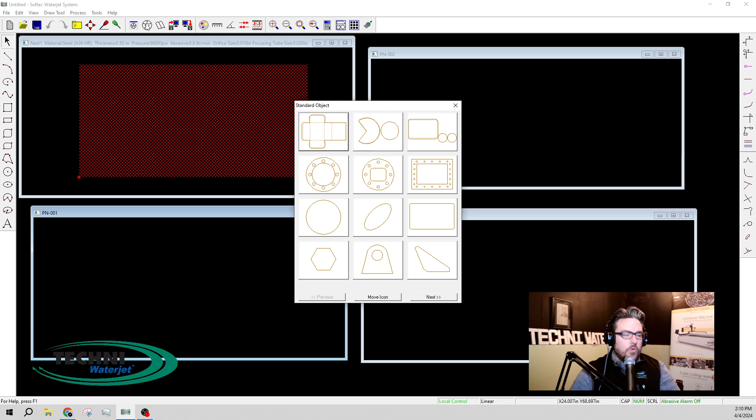You won't necessarily get the same level of control like you will for this, where you can go and do height, width, and all those kinds of things, but at least you'll have some basic shapes that you can use and then scale however you want. If you're using your logo over and over again, then you can certainly have that set up in your library. The guys can click it, bring it in, scale it, and go to town.

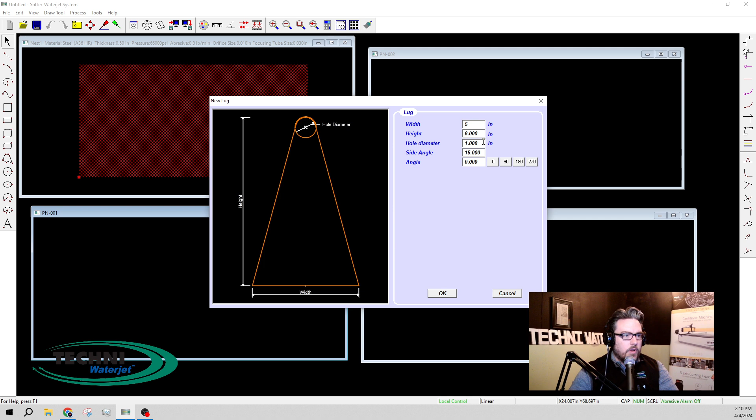In this case, for this piece here, we're going to go with the bottom width that is 5 inches wide. We're going to go with the height that is also 5 inches. And we're going to go with a hole diameter that's 2. We're going to make it a large hole. And a side angle of 15 seems fine. We could do a 90, rotate this thing around.

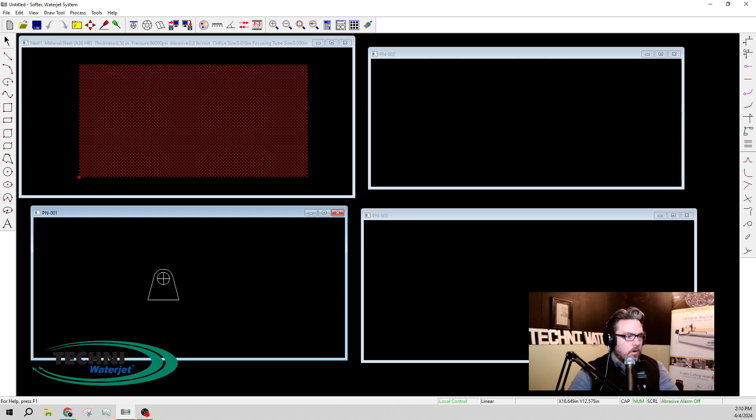However, that really doesn't matter, and you'll see why when it comes to nesting. And we'll call that good. That's our part, 1 part per object. We'll put that on the table, or put that into our window anyway for our parts, and now we'll go to part number 2.

Part number 2 will be another one of these customizable objects. We're going to go with a little flange here, gusset in this case is what it's called. It's typical 5x5. I don't need to do anything different with that. We'll just pop that in there. Off we go. And then we'll do another one that's maybe on another tab here.

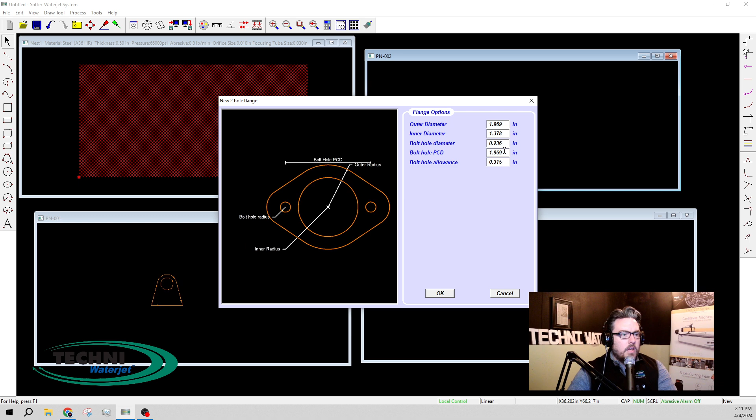Let's do something else that's more like this. This is a flange. And we'll go with one whose outer diameter is 3 inches, inner diameter 2. I'm probably messing that up. Let's do that again. I'm just making up numbers, right? So let's see. What are they calling the outer diameter here? The bolt radius pattern, 1x1, inner radius, this inner diameter, outer radius, this.

Yeah, so we probably can't make this too big. Yeah, that's what I did. I made it too big. There we go. Then we can make the bolt holes for it. We can space those out at maybe 3. Now we're talking. And then a bolt hole diameter of, we're going to go with .385. We'll make them oversized for a 3/8 bolt going through there.

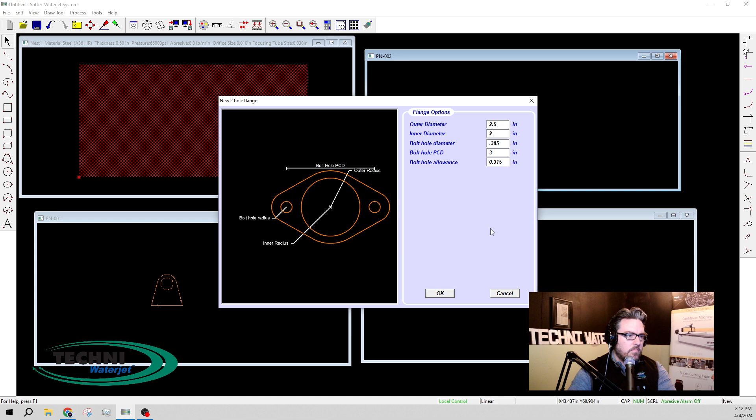And then we'll make this inside diameter here. That's good enough. We'll make that a little bit bigger, actually. We'll do it at like, how big is 2? That's way too big. I don't know. We'll do it 2. It doesn't matter. And you'll notice I can put that anywhere, right? So I could actually make these parts kind of next to one another and then make them nest as well. You'll see what I mean here in a minute.

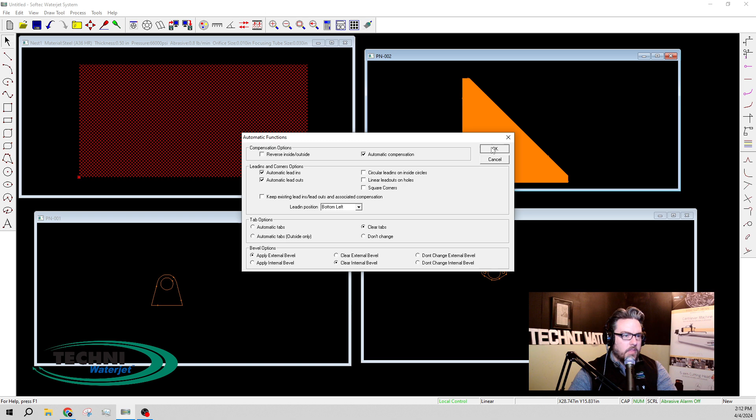But for each one of these, before I go and put them onto the table, I want to come in and just do an auto function, not nesting, but auto for the automatic leads, automatic lead out. I'm not going to do any automatic tabbing. I'm going to clear all tabs and make sure there's no tabs on there, and I'm just going to hit OK. And now we have everything we need for our lead ins, our lead outs, direction of the cut. So this is the actual part that's highlighted.

Same thing over here. We'll do that, and we'll just say auto and say OK. Same thing with this one. We'll zoom in and say auto and say OK. And everything looks good for all 3 of these parts. Simple, ready to go. If this was a part that we needed to make super quick, we'd be ready to go with a 66,000 PSI pump. I've already got it set for A36 half-inch thick material. And now we'll go in and talk about putting them on the table.

Keep in mind that all 3 of these objects are parametric. This is another unique thing with the Softec software. If I make a change to this, once it's on this table, I don't have to redo anything. It'll automatically update it. So if I come in here and want to put a tab right here, I'm not going to put a tab on a half-inch thick piece of A36, but if I did want to put a tab there, I could, and it would automatically show up over here. And I'll show you that once we get to that.

Process. We'll go to process here, project properties, and we'll look at nest. We'll look at objects. So nesting is a set of basic parameters. I have everything set to default, so there's nothing fancy I'm doing here. So we can see each one of our part numbers here ready to go.

Let's say for part number 1, we wanted to make sure we made 5 of those. So we'll just say main quantity of 5. Quantity number 2, we're going to come back to that one. Quantity number 3, let's do 6 of those. And then maybe on this one, we'll just fill the sheet. I don't know how many.

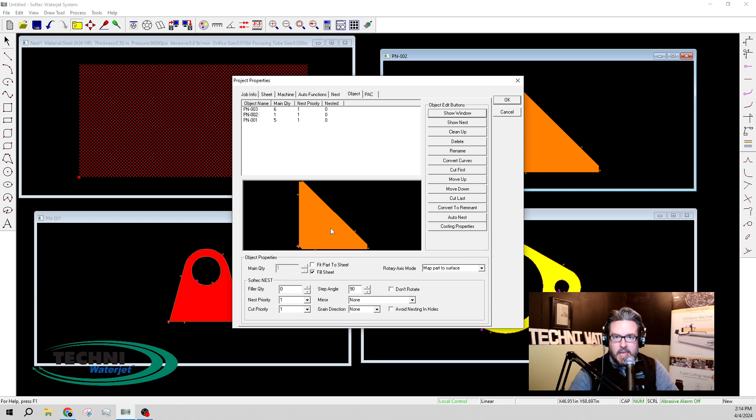I just want to make as many of those as I can. Okay, so I'll say OK. And then I'll go to our nesting, auto nest. And what you'll see it doing here is doing multiple nests. It's doing this over and over and over again.

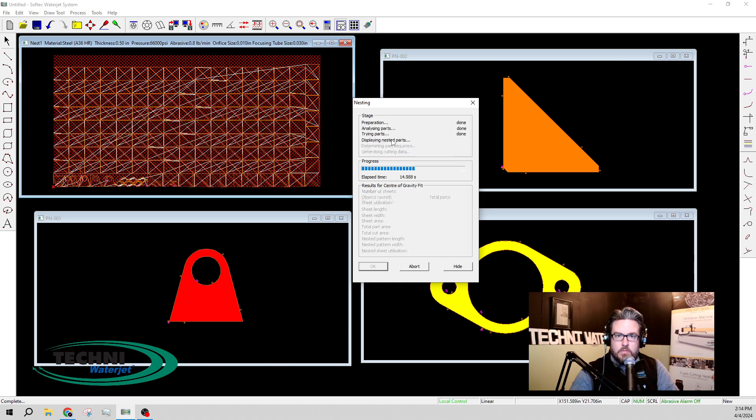This is the one fancy thing that I have pre-selected that's not default, and that is an optimization. I want it to go through every variation it can think of and try to fit as many of those pieces on the table as possible. I want it to optimize.

And as you can see, it took it 25.6 seconds to run through multiple nests to figure out what the best one was. The nested sheet utilization is 94.4%. That's pretty darn good for my first try at it, right? There's ways you can go in and play around with this and increase the utilization.

Of course, we constrained the software when we set this up. We told it so many of those, and as many of those as you can, right? So we gave it some constraints. But with that said, it was able to fit in 3 different parts, total parts 303.

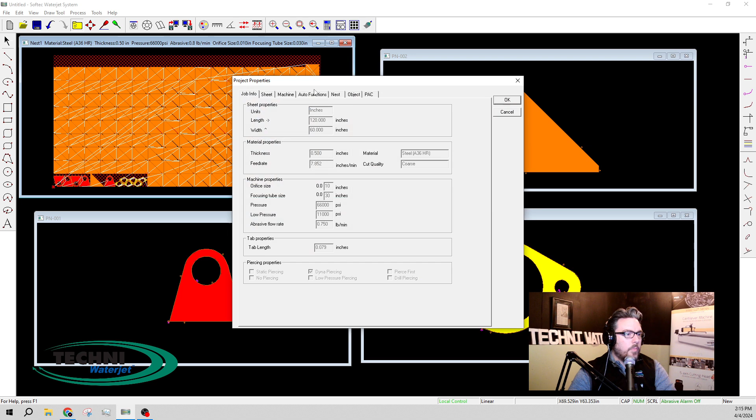I can say OK. Come back here to project properties, go back and look at the objects, and we can see that we've nested 6 out of 6 of part number 3, 292 of part number 2, and 5 of part number 1. Now there's all kinds of ways we can go and play around with this and try to increase the overall utilization of the plate.

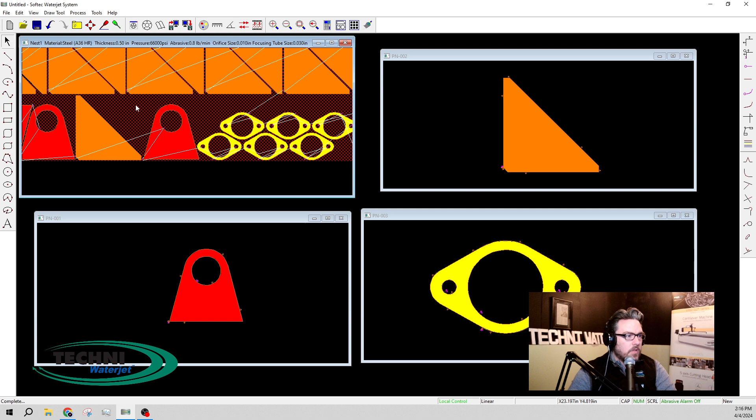You know, we could fit one more of these right here. We can clearly tell that there's room. We could probably fit more of those up here as well. But again, we told the software to only make so many of them, so therefore it did.

If we went back at this point now in the process, to objects I mean, and came in here to this one and said, give me 8, say okay, and just re-nest it again, it'll go through all those iterations all over again if I want it to. This is just a toggle that I have turned on for nesting optimization, and figure out if it can fit that sixth one.

And I don't have to try to look at the screen and count, or 7 or 8, however many I told it to. I don't have to think about that. I can go right back to the project properties screen and say how many of those are there. It'll tell me right from the screen.

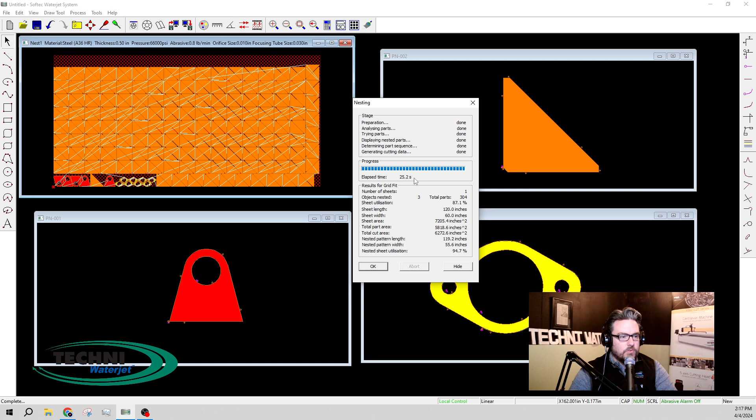And again, we went through this. It took a little bit longer, 25.2 seconds or so, 94.7% utilization. So that's better, obviously. We put more parts on the table. So yeah, we got all 8. We got 8 out of 8. And of course we only got 291 now instead of 292.

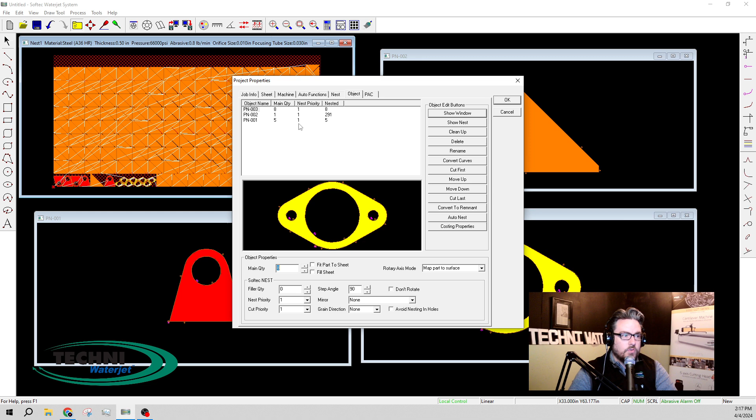So one of the nice things about this is not only does it tell us that, yeah, we were able to fit those in and what the count is, so I don't have to look at the screen or figure that out, but it would also be able to tell us if something didn't fit.

So if I go back now and tell it for part number 2 to fit 292, it'll still run through and give us this exact same result right here. It'll just say main quantity here, 292, nested quantity, 291. So it's a good way to be able to track that.

Another nice thing is once this is done, we can save this program knowing we have this strip of material, not a whole lot of material left, but let's say it's a larger piece that's left up over there. We could actually fit whatever we wanted into there and just run that. So now we have an idea of what's left over on our sheet, so we can go back and use just the leftovers. It's very handy, very easy to use that way.

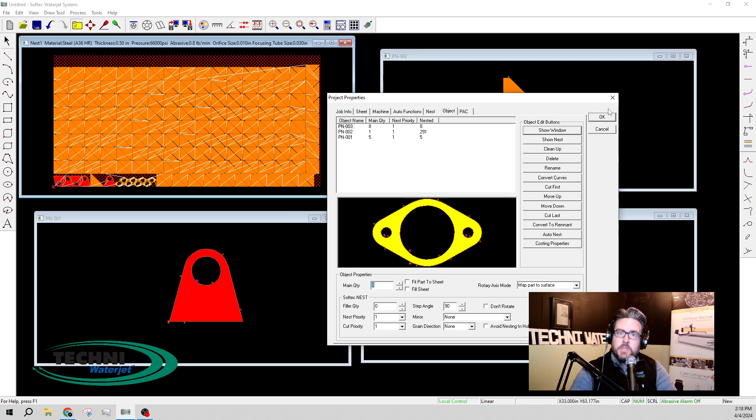And all of these things do the one thing that's the most important to us here at Techni Waterjet: to increase your uptime, to give you better uptime than anybody else, and to make you more parts per hour.